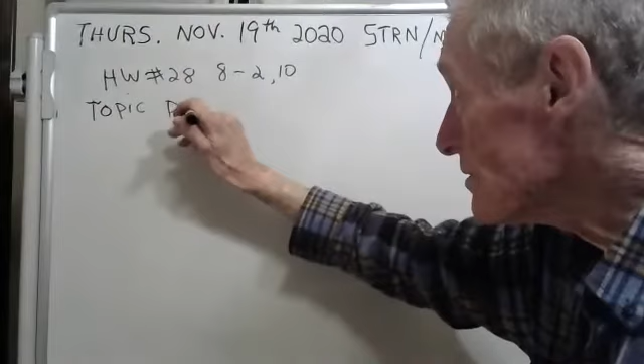Well, we're going to talk about chapter 8. The topic today is pressure vessels. Okay, the chapter, I think, is on general loading. Let me look and see — chapter 8. Did anybody have another comment or question for me?

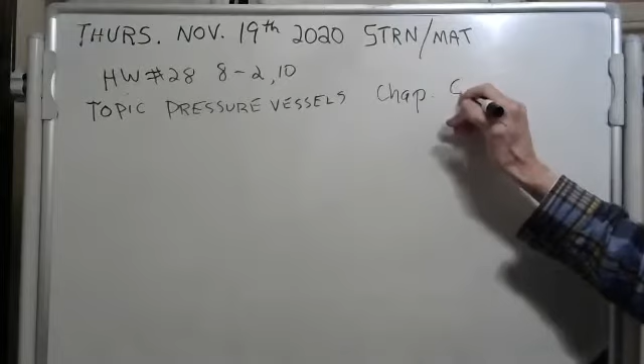Yeah, the topic really is chapter 8, which is — they call it combined loadings. Combined loadings. I call it general loading, same idea. Let's have a quick review of the different kinds of loads that we have and some of the equations we know.

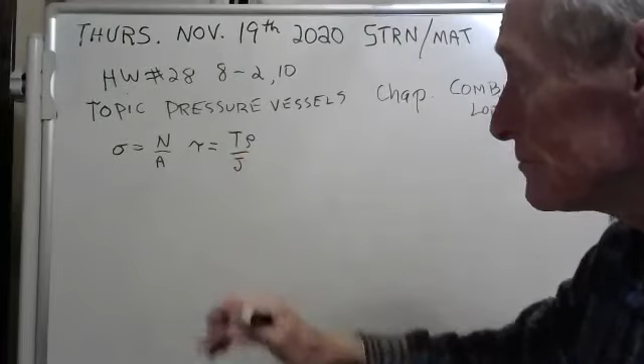You're all familiar with this one: take the normal force and divide it by the area, and you've got your normal stress. And then there's one that looks like this — that's called the torsion formula. That's when a body is being twisted, you've got some shear stress because you've got some internal torque going on. This rho here is the distance from the centroid of your piece that's being twisted.

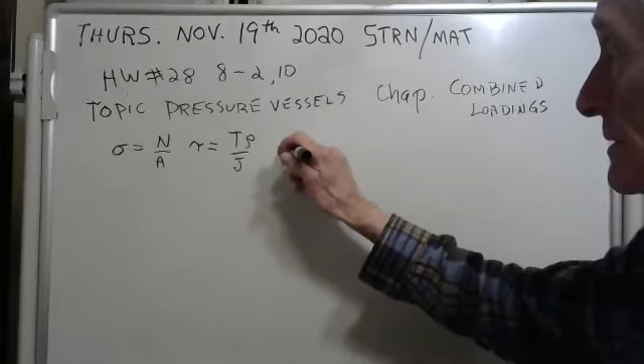And this J here is called — it's got a name, I could ask any one of you guys and you could remember it, but I can't. Just a minute — it's called the polar moment of inertia. You might have forgotten that. And then there's this one here — that's our flexure formula. You get that when you have bending loads.

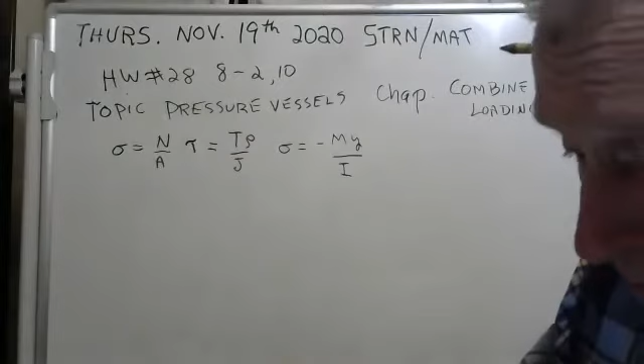See, these are torsion loads, these are normal force loads usually on an axial member, these are torsion loads, and these are bending loads — and you get normal stress, and with bending loads you get more for your money, you get two different kinds of stresses.

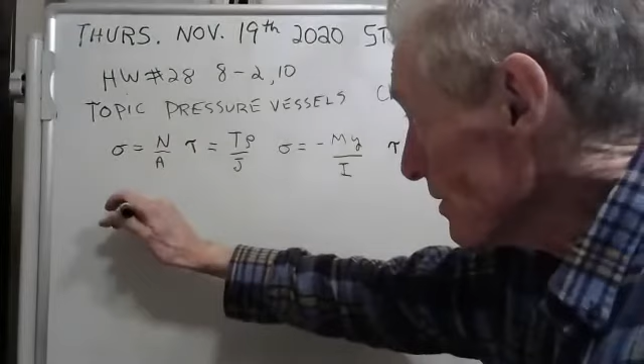We're having a little 5-minute review. Now, in order to find this normal force, what you have to do is make a normal force loading diagram. That equation there, you need a normal force. I hope I'm not boring you — I hope you know this stuff so well that you're thinking, why is he doing this, I know all this stuff. You need a normal force loading diagram.

And we've done these, you've made these. And then to use this equation here — see, that's the normal force, this here is the torque — and to use that equation there, you need a torque.

You need a torque loading diagram. And we've done that. We've made those.

You know what? We started off this little adventure of ours August 17th. Can you believe that? August 17th, September 17th, October 17th, November 17th, and this is the 19th. We've been going at this for a long time.

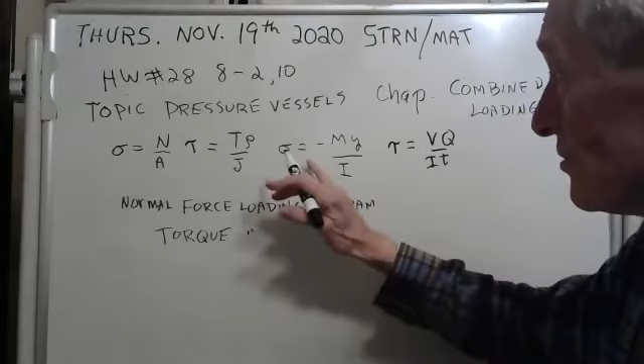And this here, for that one, that's called the flexure formula. You knew that. I could ask any one of you, I could shake you up from a sound sleep and ask you what that is, and you could say, Mr. Griffin, that's a flexure formula. You know this stuff. And to use that one, you've got to make a bending moment loading diagram.

And this equation here has a name too, and we've recently been doing it. It's called the shear formula. That's the name of it. It gives you shear stress if you have bending.

If you have torsion, you can get shear stress, and if you have bending, you can get shear stress. Isn't that interesting? And long ago, I showed you, even when you just have a normal force, there is some shear stress internally, even in a member that's only under tension or compression. I gave you those equations.

So we've come a long way. And what we've been doing all this time is pretending you just have one kind of loading. Wait a minute, isn't there 4 different kinds of loading? I thought there was 4. Maybe not. Oh well, I guess that's it.

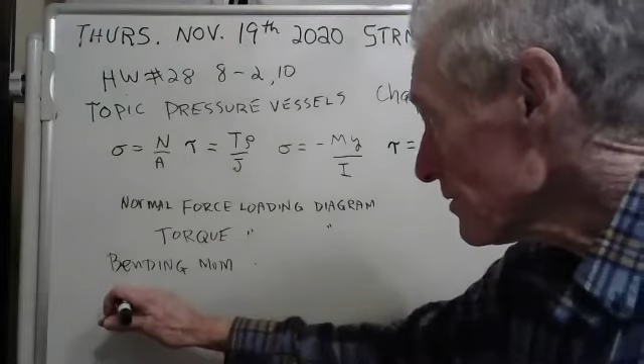I thought there was 4 kinds of diagrams: a normal force diagram, torque loading diagram, bending moment loading diagram. Oh yeah, there's a shear loading diagram too. Hang on a minute, there's 4 of these. I knew there was 4 of these.

There's a shear force loading diagram. See that shear force right there? Can you see that shear force right there? You know where you get that shear force? You get it from a shear force loading diagram, that's where you get it. That's why these diagrams are so important, because from the diagrams you get the normal force, the torque, the bending moment, and the shear force to plug into those stress equations to give you the stress.

And remember, it's stress that we're after. Well, there's one more kind of loading, and that's these pressure vessels. See, today's topic is pressure vessels.

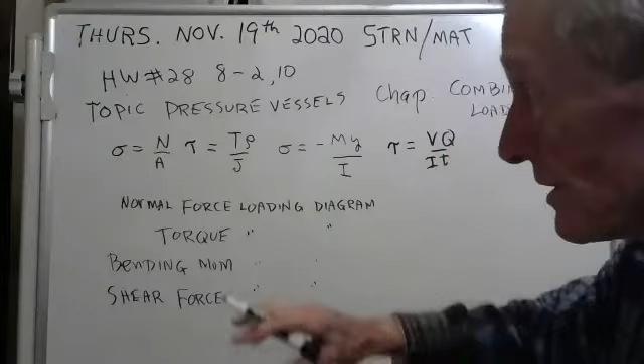Yeah, and here's the thing. All this time we've been pretending like you only have one kind of loading happening. But you can have several going on at the same time. We'll talk about the pressure vessels here in just 1 minute, and that'll be a 5th kind of loading.

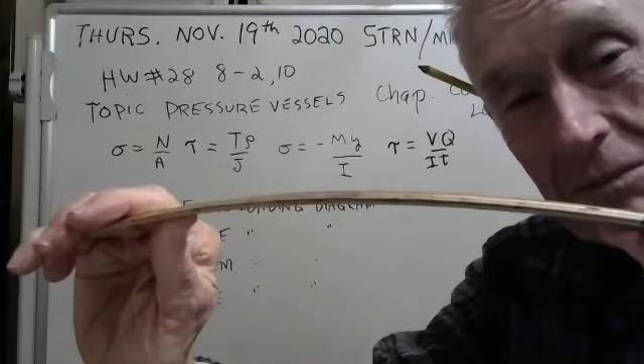But here, let me give you an example. See, I've got my ruler here, and I can bend it. Can you see I'm bending that ruler? Well, you know what, I could also twist it. Can you tell? I don't want to break this nice ruler of mine, but can you tell I'm kind of twisting it.

But did you know what? I could do both at the same time. Now watch this, I'm going to bend it, and I'm also going to twist it. Can you tell? See, there's my ruler. I'm going to bend it. I think I just heard it crack. And then I'm going to twist it. See, I'm twisting it.

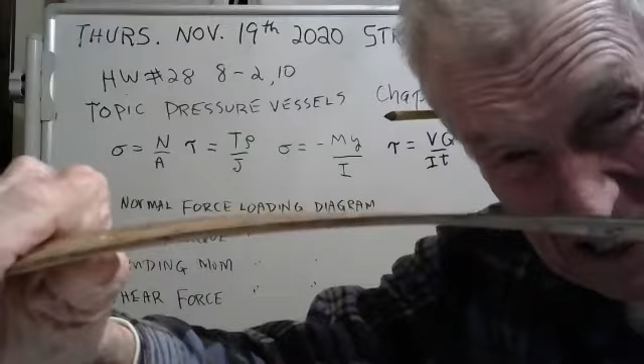You know, I could pull on it at the same time. See if I pull on it, I put tension on it. Do you understand that you could have all of these going on at the same time? They call that combined loading, or I call it general loading.

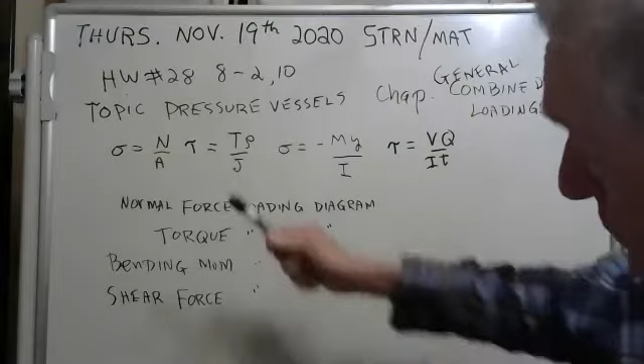And to find the stresses involved, well, you got to figure all of these. But there's one more kind that we got to talk about, and that's the pressure vessels. That's when you have a container and it's under pressure. You have to make sure it doesn't leak. Then you pump it up and it's got a lot of pressure inside. And there's two kinds here, cylindrical and spherical, on page 414.

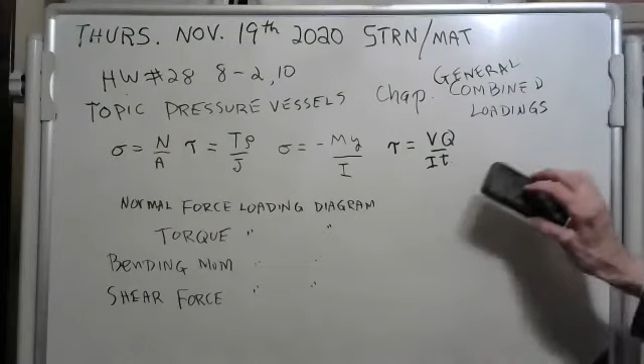So let me erase all this wonderful stuff so you know what we're talking about now. But we're going to add one more kind of loading, and that's this pressure loading business. So let me erase all this. Unless there's a question, any comments or questions from anybody?

You're working on your exam, but I don't think this stuff is on your exam. I don't remember, but I think your exam is over certain chapters, let me look this up here. Your exam is over chapter 6 and 7. Well, we're going to talk about chapter 8. That's what we're going to do now, chapter 8.

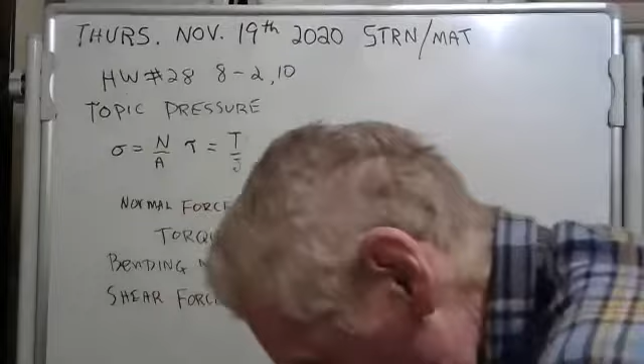I just spilled all my papers all over the place. I hate that. Dropped my book, lost my place. Okay, here's your homework, you can look that up, you don't need that. Okay, well let's see if I find my place again. We're talking about pressure vessels. Now where the heck did they go? Yeah, here we go, getting close now.

Yeah, here we go. Now, there's two kinds: there's a cylindrical kind and a spherical kind. Let's do the cylindrical kind first.

You've probably seen this if you go riding around in the countryside sometime. Now I forget, I never had one of these, but I think it says butane on it. Now help me out here - does it say butane or does it say propane? Which is it? Does anybody know? I think they have both kinds.

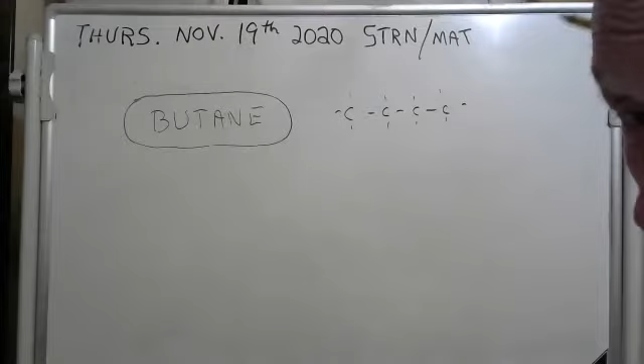Now, if I remember right, butane has four carbons and ten hydrogens on it. It's a hydrocarbon - made of carbon and hydrogen. That's butane, whereas propane just has three carbons.

But anyway, you've got a pressure vessel, and what they did was they're just looking at a section of that - kind of looking at a section of that butane tank. You know it's under high pressure because when you open the valve, it's under high pressure, and the butane or propane comes out and lights your stove or whatever you're using there.

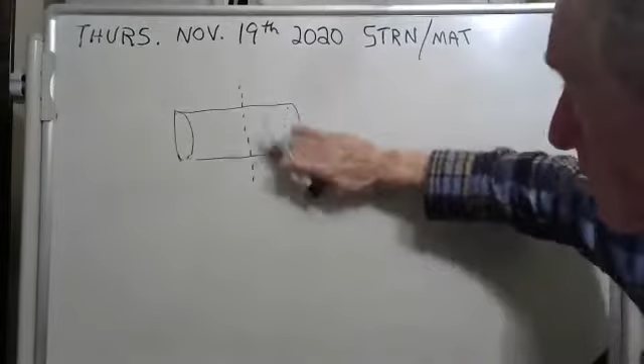And what we're going to come up with is this equation here. See, if you looked at this thing, it has what they call circumferential stress. See, if you made a section in here - now this is just an imaginary section.

My artwork isn't that great, but we're trying. See, there's a little thin skin here. It's got a thickness. There we go, see, it's got a thickness. We've made an imaginary section, and it has a thickness T. That's how thick the skin is there.

And you've got this high pressure, P for high pressure, going on inside your butane tank there. And the sum of the forces on this section right here should be 0. That's supposed to be a little t if you can read my writing - the thickness of the skin of the propane tank. The sum of the forces is 0 on everything we do in here. Nothing moves - it's just sitting nice and still in this class.

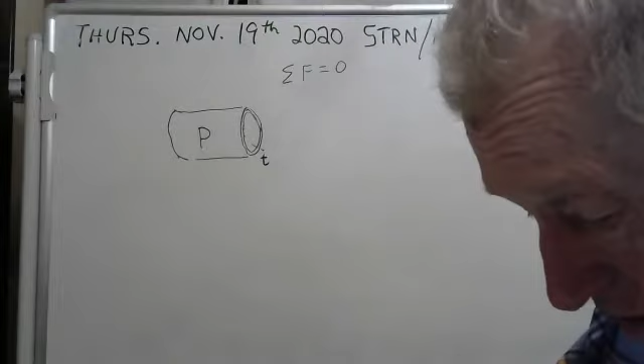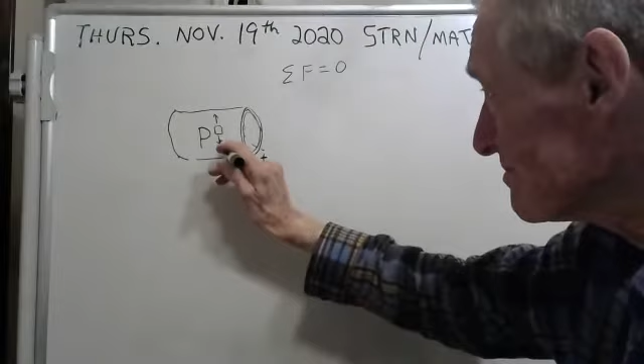And they have an equation that they came up with for the stress in this skin. See, like if you took a little section of the skin right here, it's got normal stress. They call it circumferential. It's got normal stress - circumferential normal stress. So let me write that word for you.

Oh brother, how do you spell circumferential? I think that's how you spell it. It's got circumferential stress, normal stress, but now it also has longitudinal - do they call it that? Yeah, well, I'm going to call it that. It's got longitudinal normal stress going this way. Why don't we put a little C under the circumferential and put a little L under the longitudinal.

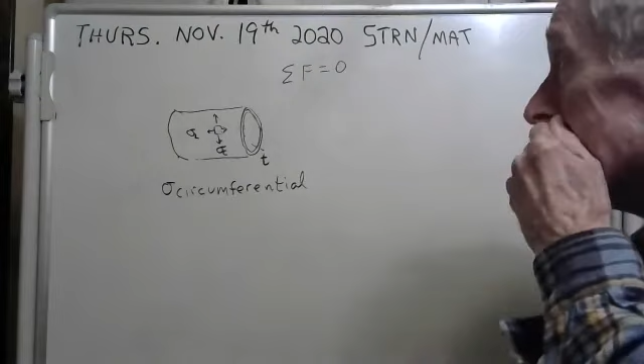Now it turns out that the circumferential normal stress is bigger than the longitudinal normal stress. We're going to show you where the equations come from here in just a minute. But how are we going to do that? Well, one way, let's get the longitudinal normal stress first.

See, the rest of the pressure vessel over here - I just took an imaginary section, and there's pressure pushing on the butane in this tank here. I don't know what the pressure is, but it could be something like maybe 50 PSI, I don't know. I don't really know how high it gets, but it's got pressure there.

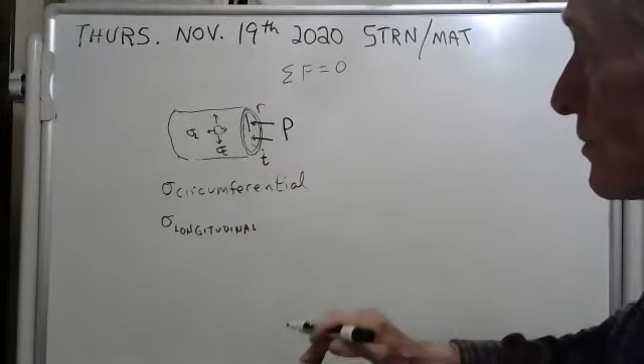And if you knew the radius of this - if you knew the inside radius of the pressure vessel - you can get that force going to the left. Here, I'll do it in red. There'll be a force going to the left, and that force will equal pressure times the area. See, the way pressure works is pressure is force divided by area, and so force is equal to pressure times the area. Can you get from here to here? This is a definition. Okay, well the area in this case is just pi - let's see, it's the pressure times pi r squared. Ta-da, we got forces going to the left.

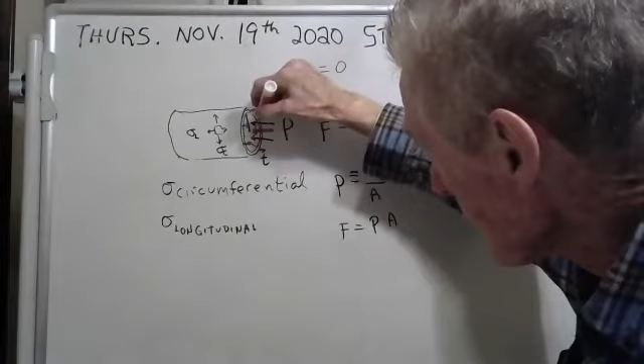Well, there's got to be a force going to the right. Now, where does that force come from? Well, you see this skin here has tension everywhere, normal stress, and that accumulates. And the total force going to the right will be the normal stress times this area. Here, let me color it for you. I wonder if green will show up - probably not, but we'll try. See, what I'm doing is I'm coloring the skin here green.

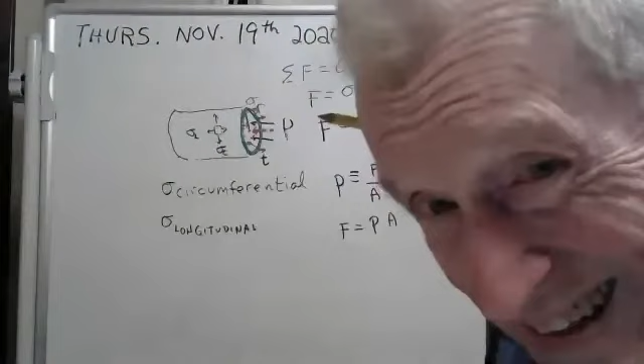It kind of came out black, didn't it? It's supposed to be green.

The total force going to the right is equal to the stress times the area of that green part, which is the length of it, 2 pi r, times the thickness. Does that make sense? If you take the stress times the area of that green area, which is the circumference times the thickness, that's the area of it. That's the force going to the right.

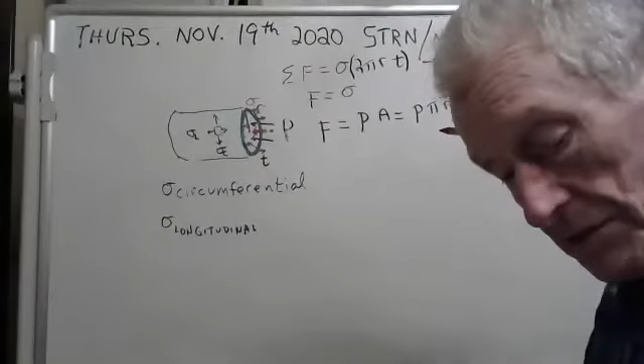And this force here, that's going to the left. Now what we're going to do is set those equal, because the sum of the forces are always zero in this class. So we have sigma times 2 pi r t equals pressure times pi r squared.

Now we're going to solve for sigma. Keep in mind, this is the longitudinal normal stress, and there'll be a p there. The pi's cancel, one of the r's cancel, and you'll have a 2t. Boy, we're done. We just came up with the equation for longitudinal normal stress.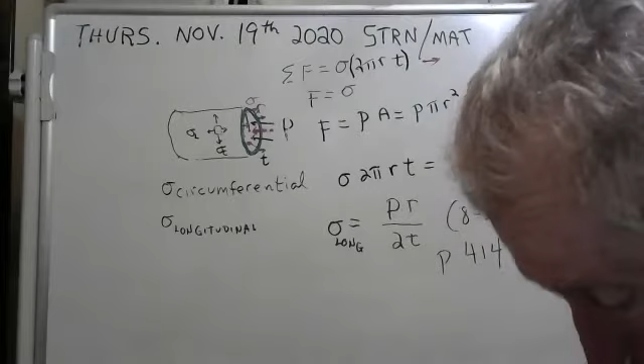Now look in your book, it's equation 8.2, on page 414. And there it is, PR over 2T. But they didn't call it longitudinal, they called it sigma 2. But don't you like to know that it's the longitudinal? It's going along this way, along the axis.

Okay, now let's do the circumferential stress. I'm going to section this butane tank differently. See, here's your tank. Well, really, the tank is like that.

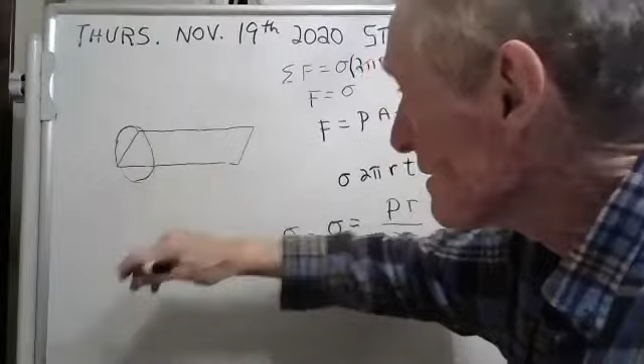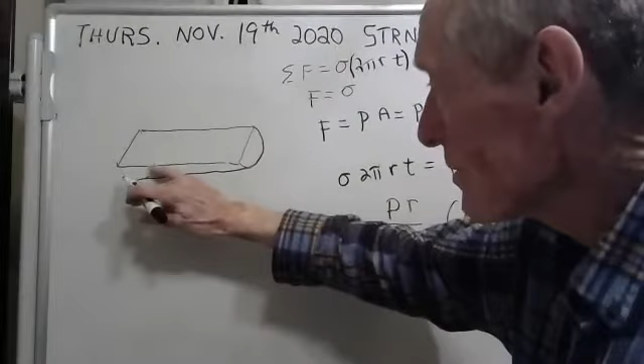Yeah. Only you wouldn't see that part. See, I'm gonna cut this tank in half. Oh, I'm no good at this artwork jazz. I don't think you'd see that part there either, would you? No, this is what you'd see. It looks a little bit more like a cattle watering trough. Sorry about the bad artwork, but we're trying.

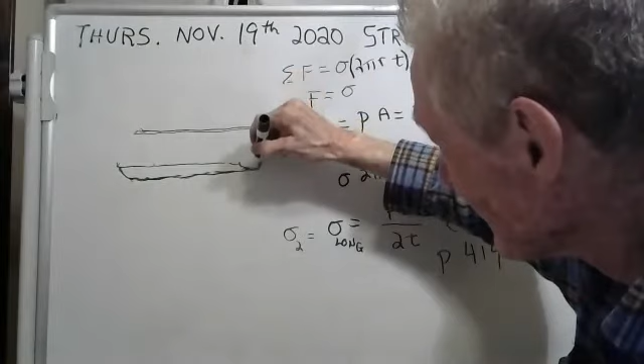You see, there's a top half, but we've sliced it off. Now don't forget, if you sliced it off in the middle, you wouldn't have that. I tell you what you'd have is this here. And then this goes like... yeah, that's not too terribly bad. You kind of get the idea there. See what you have here. We'll put some dotted lines in here.

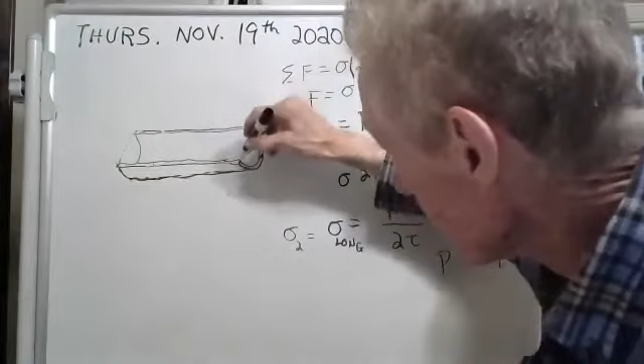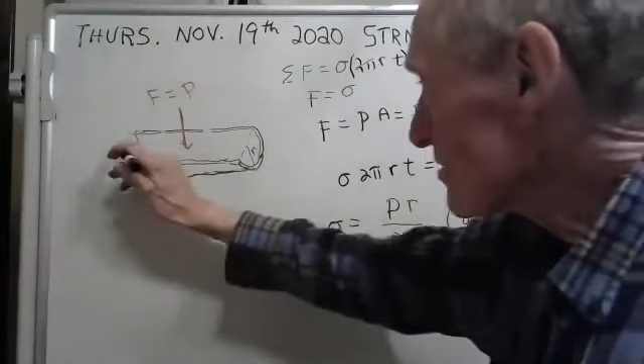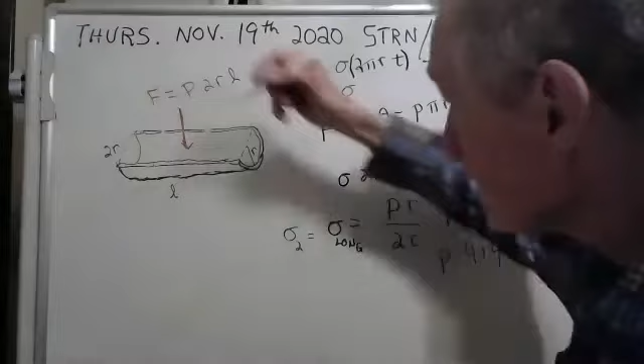What you have is a force downward from the top half of the tank, and that force is equal to the pressure times that area. That area is equal to, well, this is the radius of the tank, so this here would be 2 times the inner radius. So that area would be 2 times the inner radius times the length of the tank, which we'll call L. So that total force going down is the pressure times 2RL, 2 times the radius times the length.

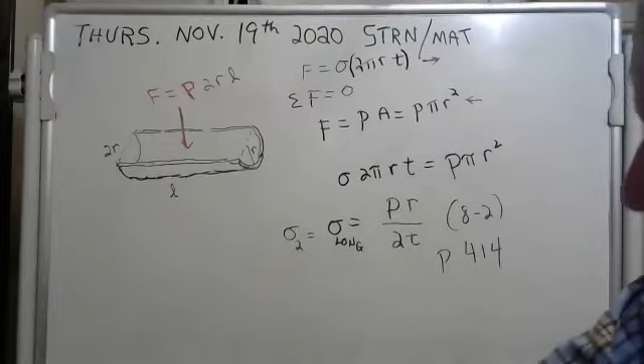There's got to be a force going up because the sum of the forces has to be 0 in this class. This here, that was wrong—this is the force going to the right. The sum of the forces is 0. What do we got going up? Well, we got some forces going up because there's tension in this skin here. You know what those are? Those are circumferential stress—there's stress, and it's the circumferential stress.

We'll put sigma with a little c there. See, you got this force going down, but the total force going up is—this is the total force going up. It would be the circumferential stress times the area that it's applied. Now I'm going to color it green. I don't know if it's going to come out green on your computer screen, but I've got kind of green here on mine. Yeah, there's your area.

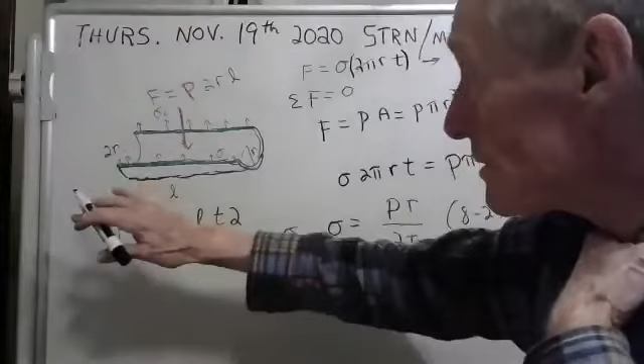Well, what's that area? It's the length times the thickness, isn't it? Oh, wait a minute—times 2, because there's 2 of them, right? There's 2 of those green areas, and each one is L, the length of the thing, times the thickness. Boy, we've got it. This is the forces going up, and this is the force going down.

And what we're going to do is set them equal. Here we go. Forces going down are P2RL. Forces going up, circumferential stress, LT2.

Now we're going to solve for the circumferential stress. I'm going to call it sigma little c. I think the book calls it sigma with a little 1 in there, but I like the c because it tells me what it is. And here goes, it's going to be P when you solve for that stress.

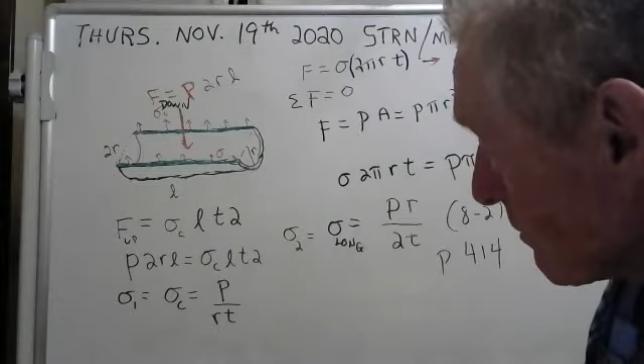The 2's cancel, the L's cancel, and it looks like P over RT. Is that what the book got? Look and see. No, I did that wrong. No, the R goes here in the numerator. I did bad algebra there, folks. It's PR over T. There you have it.

Hey, that equation's in your book. Look, it's equation 8-1, and it's on page 414. We now have the equation for circumferential stress in a cylindrical pressure vessel. That's the name of this. This is a cylindrical pressure vessel.

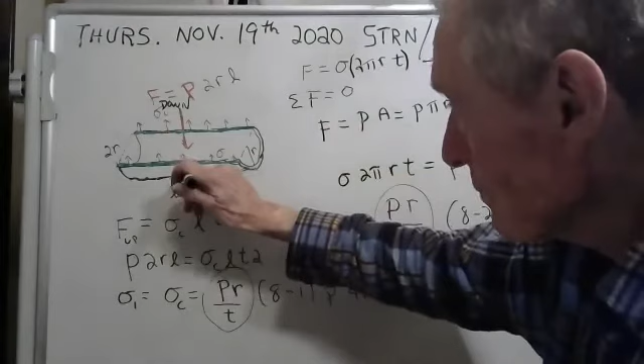And I want you to compare these two equations. Here they are. You know what? The circumferential stress is twice as big. So that's got a 2 in the denominator. That's why I drew it twice as big. See, if you take a little stress element, you'll be seeing more of these stress elements. And you draw that little stress element, it's on the skin of your cylindrical pressure tank. You've got your longitudinal stress, and your circumferential stress is twice as big.

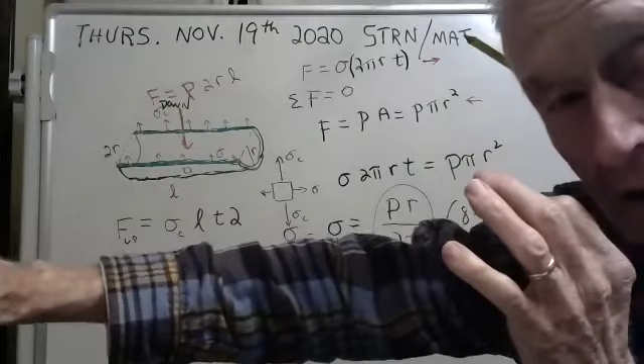Isn't that interesting? Twice as big on the circumferential stress. I think maybe that's why, you ever see those balloons that the clowns blow up? They're real long, but they're real narrow. Have you seen those balloons? They may be like 2 feet long, but only about 1 inch in diameter. How come they don't blow up big and round? Because the circumferential stress, where is it? It's bigger. It's harder to blow up. I don't know if that made any sense.

And then finally, there's spherical pressure vessels, and you might see some of those sometime if you drive over by the refinery, the gasoline refinery over there on the west side of the river. There's a picture of one on page 416. Let's do that now. Let's get the cylindrical.

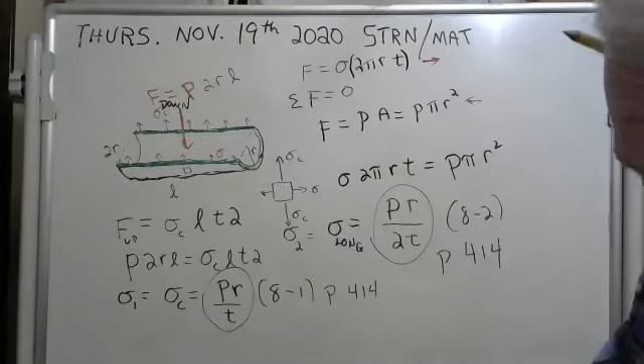Any questions so far? Any questions so far? Gee, that silence kind of bothers me. I wonder, let me see if anybody's still out there. Yeah, we still have a good crowd. Let's put it this way, they logged in. I don't know whether they're still with me, but they logged in all right.

That's good. Okay, I'm going to erase all this, and I'm going to do a spherical pressure vessel. Here we go. We'll erase all that. Pretty fascinating stuff.

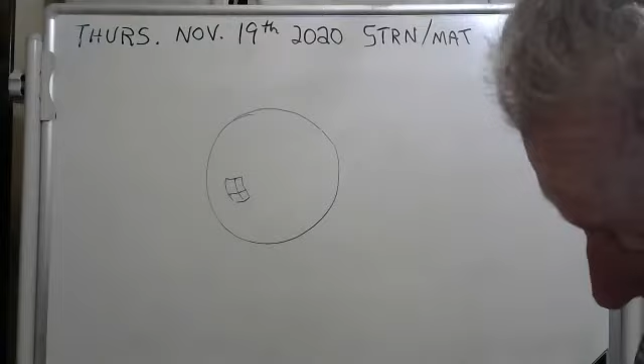There's an apocryphal story about some fellows that went in one of these spherical pressure vessels. Here it is, ta-da, spherical pressure vessels. Here we'll add a little artistic license here to kind of give it that 3D look. Of course, there's a way to get in these. These are supported by these supports, and they put the gasoline there, and it's under a certain amount of high pressure. And they emptied one of them out, and the fellows got in there, and it was awfully dark, and there was a little bit of gasoline left in there, and they forgot their flashlight. So one guy said, 'Well, I got a match.' You can guess the rest of the story. It's just a joke.

Well, let's do that, and we'll get our equation for the spherical pressure vessels, and then we'll work some problems. Here we go. Now, what we're going to do is we're going to take an imaginary section, and we're going to just cut this thing right down the middle.

And what I do is I do this with my imaginary chainsaw, my virtual chainsaw. So it's been a while, I haven't worked a chainsaw in 2 or 3 years. Just let me see if I can remember now. First of all, let me see, yeah, the chain moves pretty good. It's lubricated pretty good. Let me push this little button here to lubricate it a little bit. I'll push that and kind of move the chain. Yeah, I got some oil in there.

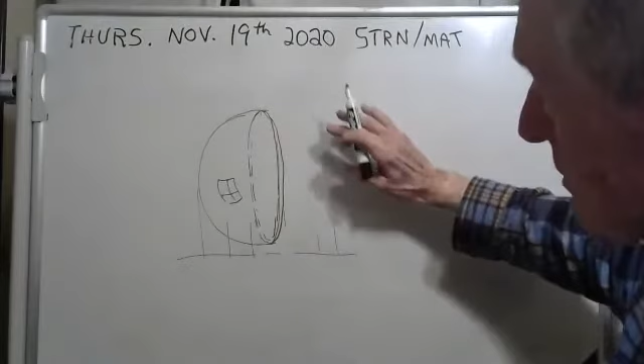And let's see, this has a little thin skin here. I'll make this thin skin. There's your thin skin, kind of hard for me to draw, but I'm trying. Now the rest of this, we cut it away, it's gone, and we need to make this dashed, I guess. No, I should have made that one dashed. Oh well, you got the idea.

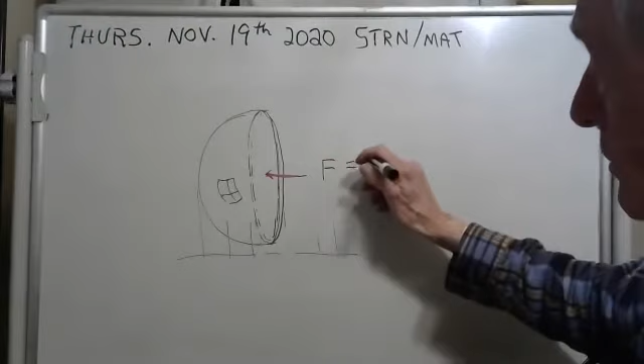And it's the same kind of thing. There's going to be the other half of your pressure vessel. We're doing a spherical pressure vessel. It's under pressure, and it's going to be pushing, and it's going to have a force going to the left. And that force is going to equal the pressure of whatever it is, gasoline let's say, inside the tank times the area. Well the area of that, if this is the inside radius r, that area is pi r squared.

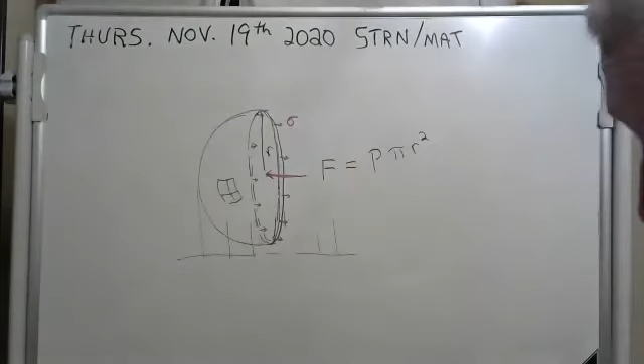Ta-da, that's it. Take the pressure times the area, you got the force going to the left. Now what's going to the right? Well going to the right, you got stress in this skin here, and it's under tension. You've got normal stress, and the rest of the pressure vessel, of course, pulling you to the right.

Now the total force going to the right is going to be that normal stress times that area. Here, I'll color it green. We're going to color it, it's just this skin here. We tried to color it green, there we go. And that area of that skin, well that's the circumference 2 pi r times the thickness t. That's the area, it's the distance times the thickness. Distance is the 2 pi r.

Now we're going to set these equal. This is the force going to the left, and this is the force going to the right. Set them equal: P pi r squared equals sigma 2 pi r t. Now when you solve that, you'll get the normal stress in your spherical pressure vessel to be P R over T. Boy, that's it. Wait a minute, what happened to the 2? I forgot it, there it is. It's PR over 2T. You'll see that equation on page 415.

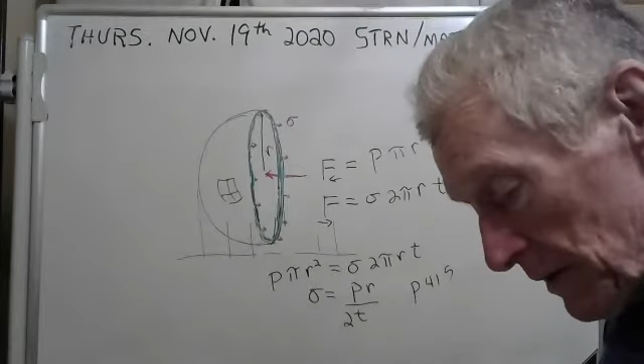Okay, well good, now the theory is over. We're going to work some problems now. Do you have any questions before we work some problems? Well all right, let's work some problems. I need to erase all this stuff so we can work some problems. I wanted to work problem 813, it's on page 419.

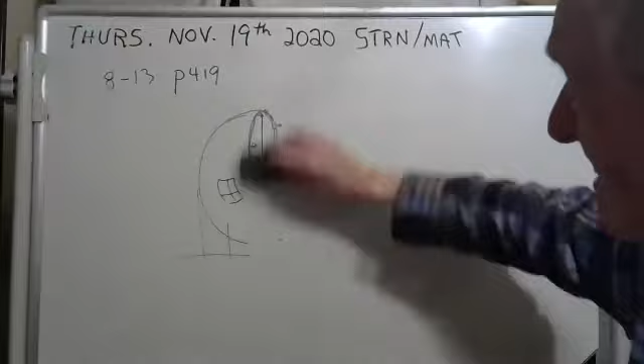All right, well let me erase all this. We've got our equations now, I think we're okay. So we've come to the end of all these equations, we just need to put them together. Now what you got here is a cylinder.

And let me draw it. You've got a cylinder, it's of diameter 24 inches. You'll see it there in your book on page 419.

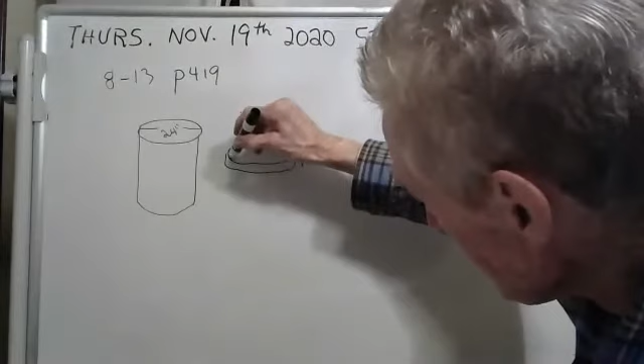And we have a steel hoop that we want to put around it. But there's a problem with this steel hoop, let me draw it for you. We have a steel hoop, and it's got a width of 1 inch. Our artist's rendition - see, it's got a 1 inch width and thickness of a 1/4 inch. Here, it's kind of hard to draw, but I'll try. It's got a thickness of a 1/4 inch.

Kind of like that. I think you'd see this. Wouldn't you see this bottom part kind of like that? Artistic. Yeah, there you go.

See, you got a ring. Isn't that what they call it, a ring? And a hoop? No, they call it a hoop. They call this thing a hoop. You could call it a ring if you wanted to.

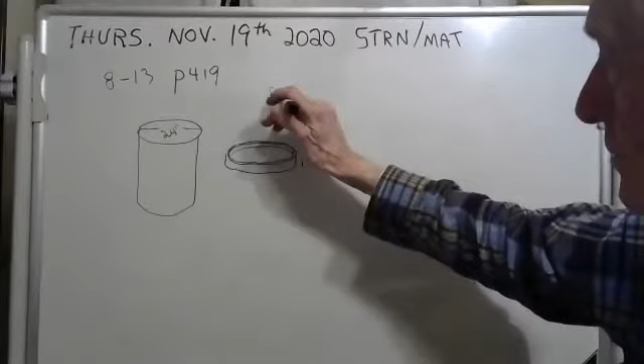And the thickness is a 1/4 inch. You see this little itty bitty distance here? Kind of hard to draw, but I'll try. That is 0.25 inches. Kind of a thin ring.

Now here's the problem. The inside diameter of this ring is too small. It's 23.99 inches. They want to put the ring, or the hoop, on that cylinder, but hey, it won't fit. They can't get it on there. It's a little bit too small.

So here's what they're going to do. They're going to heat it up. If they get it hot enough, it'll fit on there. You know that? Now, we've studied that. It's been a while, I forget which chapter it is, but we studied that. There's an equation that goes like this.

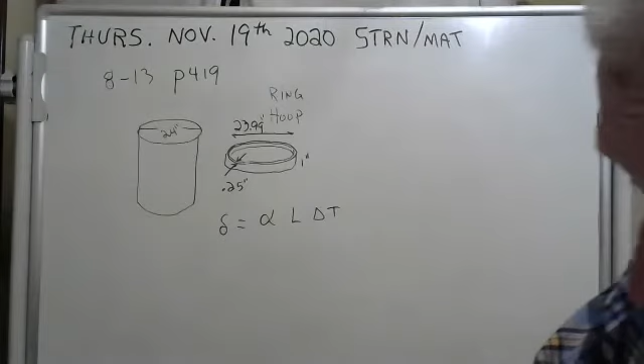And this thing here is a lowercase delta, and it stands for... I wonder, let me ask somebody. I got to find out if you guys are asleep or what. Let me go to my friend Samuel. Samuel, unmute and say hello, please. Oh, good morning, there he is. Hey Samuel, what does this lowercase delta represent? Do you remember?

How much the length changed? Yeah, very good, excellent, that's exactly what it is. Now, the name of that is deformation. It's deformation. But Samuel knows exactly what it means. It's just going to stretch. See, when you make it hotter, it's going to stretch.

Now, what's the temperature? It says here right now it's 65 Fahrenheit. Let's look up this thing, this alpha thing. Now it's got a name. It's called, oh brother, the temperature coefficient of thermal expansion, maybe? We studied it.

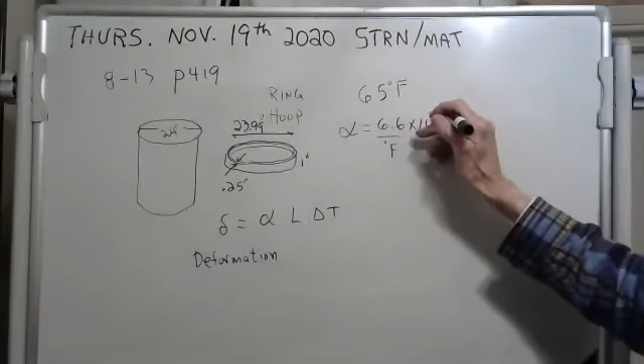We'll look it up, go in the back of your book. But now we need English, senor, when you're dealing with Fahrenheit. So did they tell you that this here is... yeah, it's A-36. So look up A-36 steel, and alpha is, let me write it down for you. It's 6.6 per degree Fahrenheit, 10 to the minus 6. Can you find that?

It's in this flap of your book, my thumb is wiggling on it where it is. And they call it the coefficient of thermal expansion, that's what they call it. What did I say it was? The temperature coefficient of thermal expansion. Same thing. So we got, look at here, we got that.

Now the length. Well, the length is really the circumference. Let's figure the length. Now the length is going to be... they taught me in school many years ago, circumference is equal to pi d. It's equal to pi d. Or you can go 2 pi r if that makes you happy. But this will work, pi times the diameter, which is

23.99 on our hoop. And we can get the length of the hoop. Look at here, we can get the length of the hoop. Now this delta though, I don't know what that is. We're going to work on that. I'll tell you what that is.

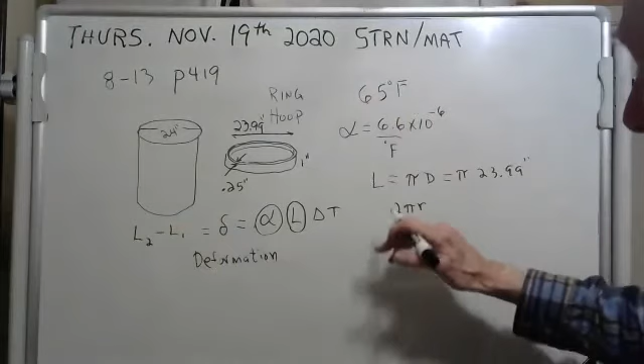That's going to be your final length minus the initial length. Now the initial length, here, let me write these down. That is the initial length of your hoop. But see, the final length of your hoop, you want it to be pi times 24 inches. See, and if you take the final length of your hoop and subtract the initial length of your hoop, you'll get your deformation of your hoop.

We can get these. The final length of your hoop, you can get that. You got a calculator. The initial length of your hoop, you can get that. You got a calculator. And look, here's an equation. Really, there's only one unknown. You can find that delta T. Now I'm going to shut up, and I'm going to give you 2 minutes if you need it.

I'm going to be quiet. It's time for you guys to do something. Don't let me have all the fun. I'm going to let you find the change in temperature there. Go for it.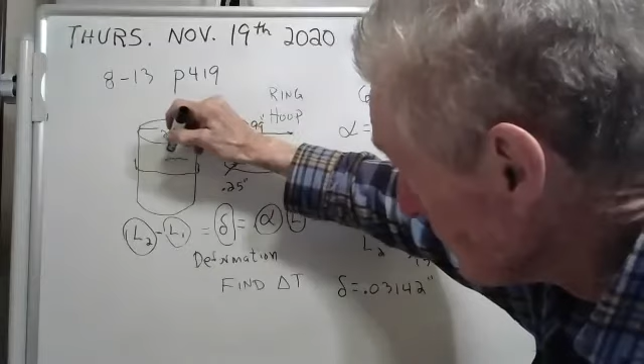Okay, you understand now that we put the hoop on here. It's on here, it's the artist's rendition here of the hoop. And there it is. Kind of hard for me to draw, but we put it on there. You can't see that back part, but you get the picture. We put that hoop on there, it just fit, but we had to get it hot.

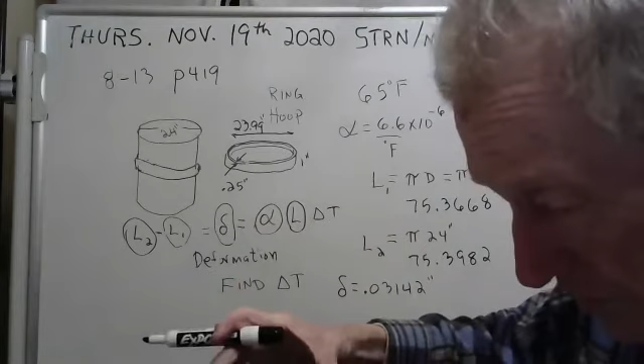We had to get it 128 degrees, it would slip on there. And now we're going to let it cool back down. We're going to let, you know what's going to happen? It's going to contract and it's going to squeeze that cylinder, isn't it? It's going to put pressure on that cylinder. Now we have an equation for that.

We have two equations. I think the one we want is this one here for the circumferential stress, and it goes PR over T. Remember, we just talked about that. You're definitely going to have tension in that hoop. It's under tension and it's squeezing. It's putting pressure, see that P right there? Can you see that P? It's putting pressure on your cylinder.

We know the thickness of the hoop, it's 0.25. We know the radius, well in this case it would be 12 inches, wouldn't it, for the radius? We know a lot of stuff. Yeah, let me write the stuff we know. We know the radius of the hoop. Let me make some room here. The radius of the hoop is, well, it's 12 inches, no doubt about that. The thickness, we know the thickness. The thickness is 0.25 inches, we know how thick it is, got that.

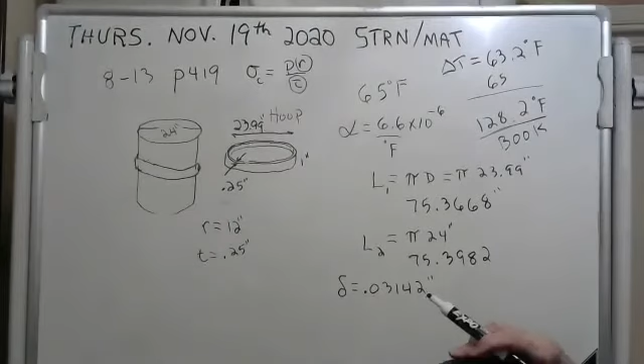Now what they want us to find is the pressure that hoop puts on the cylinder. If we could only find this, if we could find the normal stress, the circumferential normal stress, then we could find the pressure that it exerts on the cylinder. Now, how are we going to do that? Well, here's the big plan. I just need a little room here to operate.

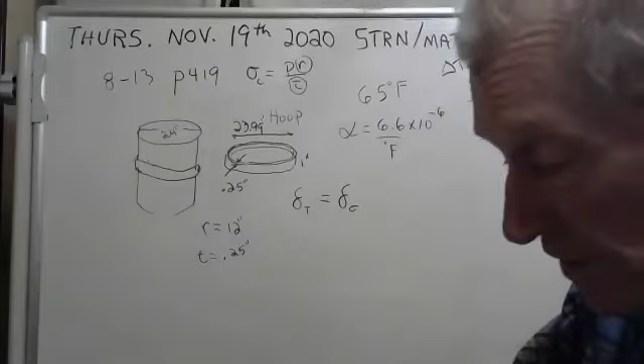We had a thermal deformation because we heated up the hoop. And when it cools back down, that's in a sense going to be the normal deformation. It really can't contract, but it's not going to contract, but if it could, I don't know how to explain this.

We know what this is, we figured it out. It's alpha L delta T, and we know all of those things. But what is the deformation? Well, we had an equation that we learned long ago. Do you guys remember this equation? Normal deformation is NL over AE. Does that ring any bells?

I think that's what we're thinking. One way of putting it is this: we could have expanded this hoop instead of by making it hot, just by increasing the tension in the hoop, the normal force.

See, the normal force over the area, that much, you know what that is? That's your normal stress.

And the E, we could look up the E for A36, and the L. I think we can get all of these. I know we can get the E. If you look up the modulus of elasticity for A36, it's 29 MSI. Let me write that down. It's 29 MSI, megapounds per square inch. So we know that.

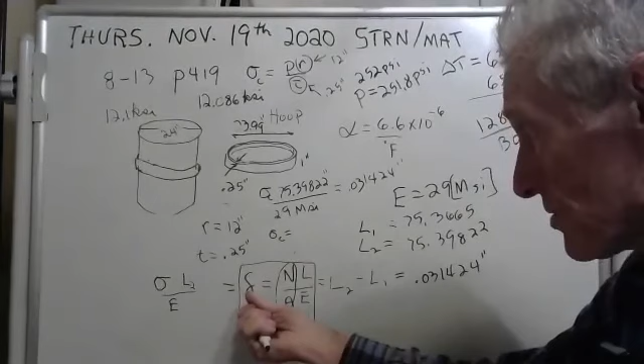They rounded off. And how did we get all that? Well, we used a formula. I don't know if you remember this one. We used a formula for linear deformation, and it took me a while to realize that we knew what the linear deformation was. It's just the difference in those two lengths.

I thought that problem was kind of hard. I don't know about you guys, I thought it was kind of hard. Do you have any comments or questions on that problem?

Well, we have time to get started on another problem, and I wish we had time to do it, but I could get you started, and you could finish it.

Let me ask somebody. Julian, unmute and say hello. Hey Julian, I want your honest opinion, I thought that problem was kind of hard, what did you think? Yeah, I think it was kind of hard. I agree, yeah, it's kind of hard. Well, here, we got 5 minutes, I'm going to get you started on another problem, but that was kind of fun.

Okay, we did that, we got their answers, and we used an equation that we'd probably forgotten about. See, the critical thing on that problem was, if you could have stretched that hoop using normal stress, I don't know how you'd do it. I guess maybe just...

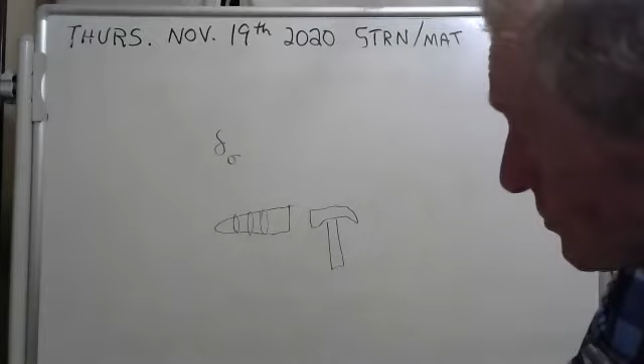They have these things like jewelers have where they measure rings, different size rings. Well, if you had something like that and you took a hammer and just took your hoop and pounded that, got your hammer here, and pounded that in there, you could stretch that, and it would cause a normal stress.

And what we did was we set the thermal deformation equal to the normal deformation equal, you probably should put an in there, maybe that's what the book used to do. That's the normal deformation, that's the thermal deformation. That was our secret.

Oh, I was going to show you another problem. We got 3 minutes left. This is problem F8-2, and the beauty is you guys could finish this problem. We have a cantilever beam.

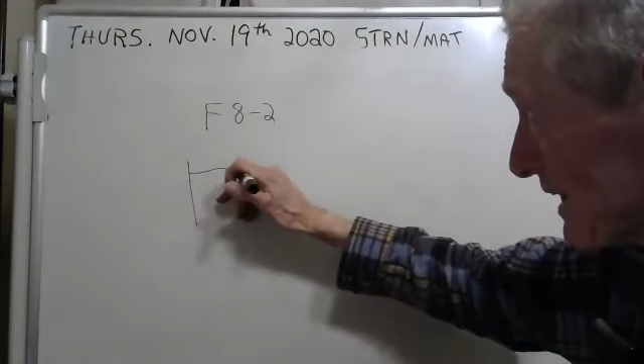It's got a fixed connection, it's got a section here, and I'm just going to talk to you about the external forces for a minute. I've got 2 minutes. You've got 400 kilonewtons here, and this is a half a meter.

And what we're going to do is we're going to section this, and we're just going to look at this section, and we're going to put all the forces on that section. Well, you got the 400 kilonewtons.

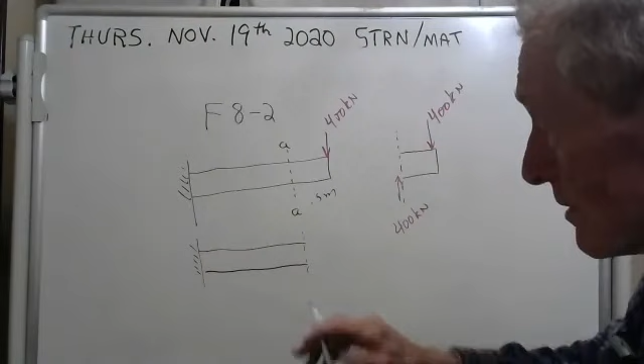And won't you have to have a 400 kilonewtons going up? Well, of course. So what does that mean on this section here? If you section this like this, can you see that you would have to have a 400 kilonewtons, equal and opposite, Newton's third law...

going down. Now that's just shear force, and that's positive shear going down on a left-hand member. This is a shear force, and it's considered positive shear if it's going up on a right-hand member. But you're going to have a problem, this is going to start spinning, so you've got to have a bending moment.

And that bending moment, if this is 0.5 meters, can you see that that bending moment is going to be 200 kilonewton meters? You got a bending moment.

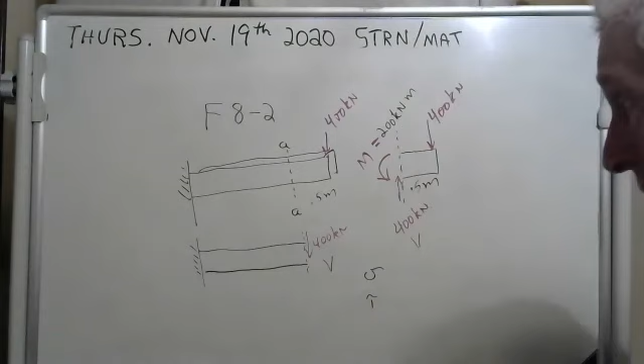Well, we got all the red stuff. And what they wanted you to do is they wanted you to take this cross section, it's a rectangle, and find the normal and shear stress at a point on that cross section. That'd be really good exercise for you to try to do. The answers are in the back because it's a fundamental problem.

They took a cross section, but they didn't go in the middle, they went a third of the way up, right about in here, and they wanted you to find the normal stress and the shear stress at that location. We have the formulas, and I wish we had time to do that, but I got stuck on that other one. But you can do it.